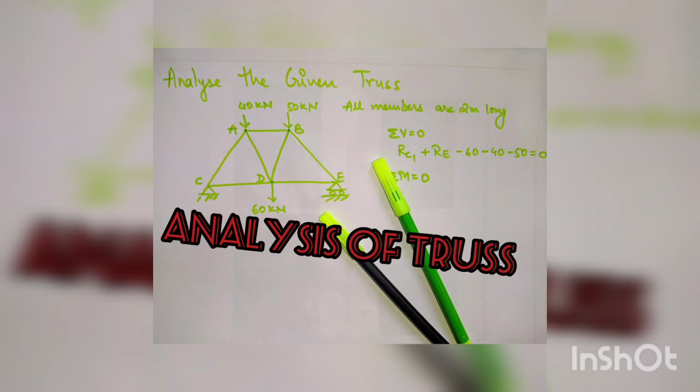Welcome. In this question, we have to analyze this truss.

So first, we'll be identifying the determinacy of this truss. One is internal and one is external indeterminacy. You can see one is the pin joint and one is your roller joint. For the pin joint, one vertical and one horizontal reaction will come, and for the roller, one vertical. I'm taking positive x direction and positive y direction as the reactions. So 3 reactions and 3 equilibrium equations, so external determinacy is 0.

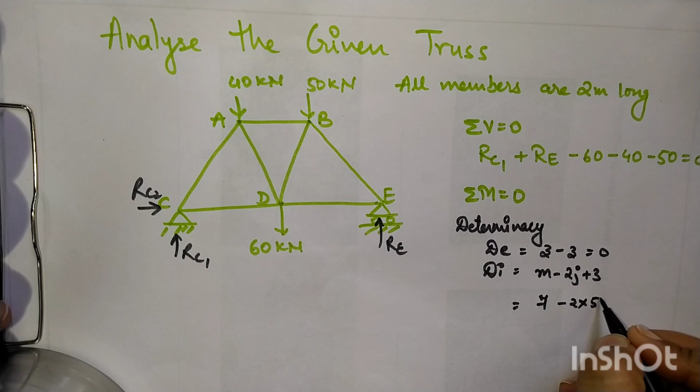Then internal. The formula is m minus 2j plus 3. The number of members is 7. The number of joints are 1, 2, 3, 4 and 5, so 5 joints. So this also comes out to be 0. So this is a determinate truss. Now we'll be identifying the reactions. We'll do summation of all the vertical forces equal to 0, so these 2 reactions equal all the forces coming from above.

Now we'll be doing summation of the moments. We'll be choosing C, and take all the forces. I'm putting this dot so that perpendicular distances can be found. Since all the members are 2 meters, this is an equilateral triangle. All the angles are 60 degrees. So this distance comes out to be 1.

Now I'm taking the moments. This 40 into perpendicular distance 1, so 40 into 1. This 50 into 3, also clockwise. 60 into 2, also clockwise. Why are we not taking the slant distance when all the members are 2? Because we are interested in perpendicular distance.

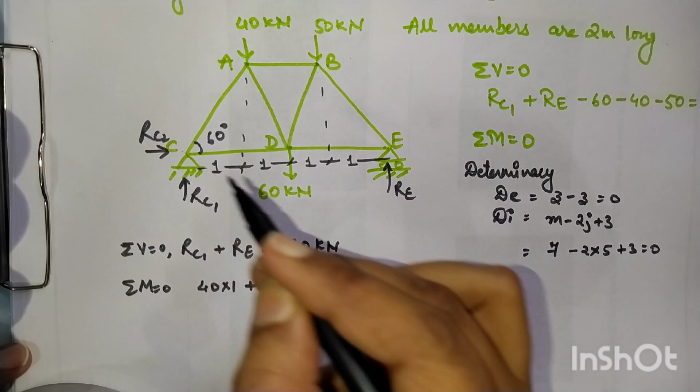Now the perpendicular distance for RE is 4, and it is anticlockwise, so negative. I am writing everything like that. So our reactions came out as 77.5 and 72.5. I am writing all the reactions here.

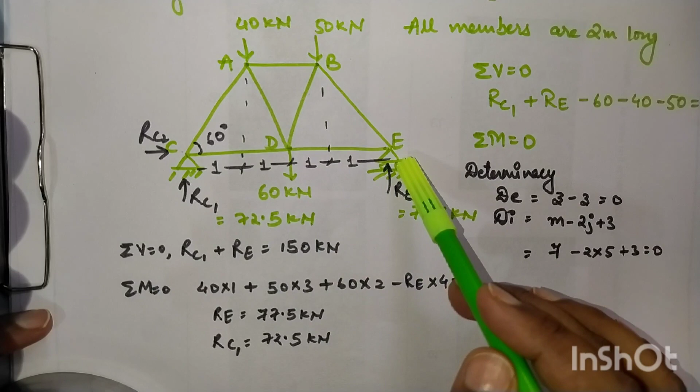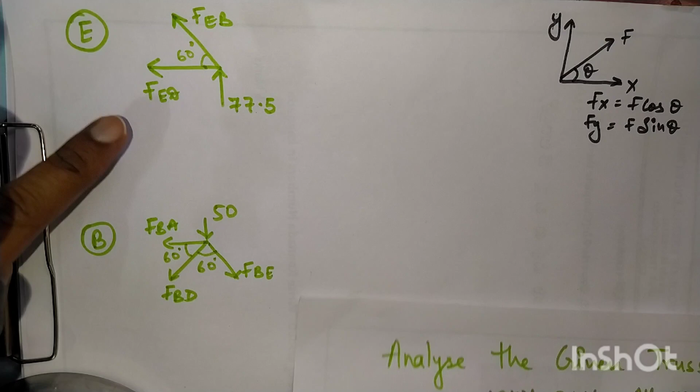Next, we'll be resolving all the forces. We'll take joint E because 2 are unknown and 1 is known. So 2 equilibrium equations and 2 unknowns, we can solve it. So I'm making joint E and joint B. The formula I'm using is Fx equals F cos theta. Number 1, all the vertical forces equal to 0. Number 2, all the horizontal forces equal to 0. So I am resolving all the forces at joint E and joint B here.

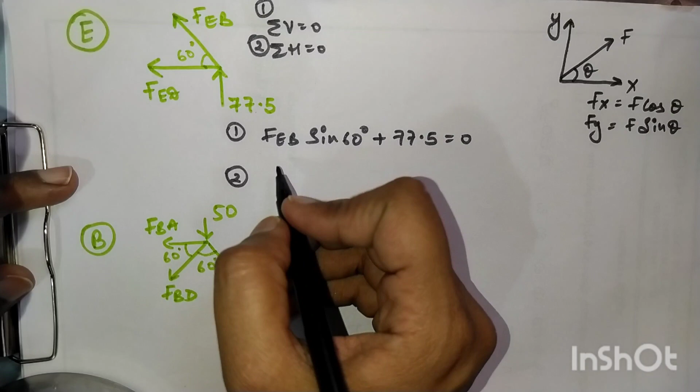For number 1, upward forces, we consider upward, the y-axis, positive. This is going up, so I write it as positive equal to 0. Number 2 is horizontal, but these 2 are going in the negative x direction, so I make them negative. Putting it all together, here come FEB and FED, the values going on to joint B.

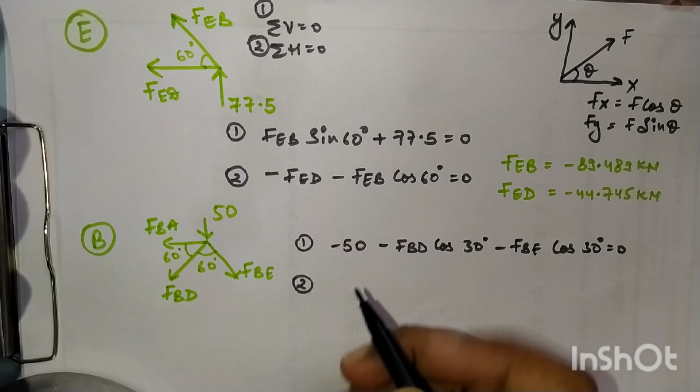Downward forces we consider negative, so minus 50 will come, and FBE and FDB will also come as negative because they point in the negative y direction. These 2 forces point in the negative x direction, so I put them as negative. Computing all this, we get the FBD and FBA values.

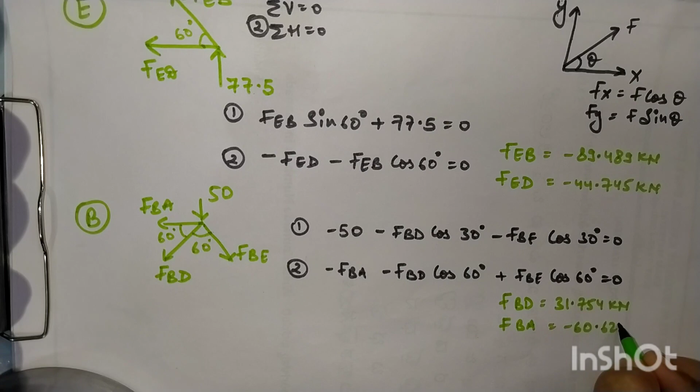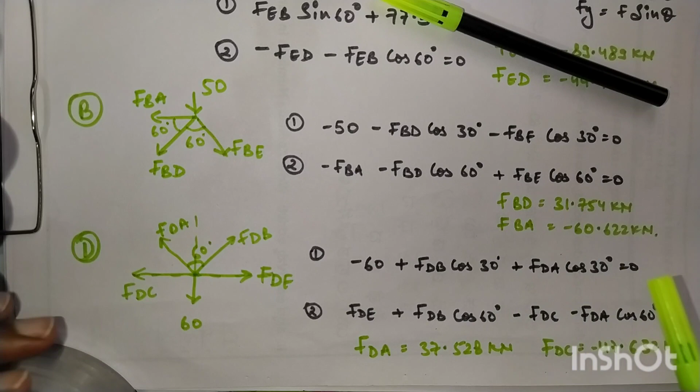Next is joint D. In joint D, these 2 we already identified and these 2 are unknowns. So we have 2 unknowns and 2 equations, we can solve this. For summation V, these 2 are going in the positive direction, these 2 in the negative direction, and minus 60 is also negative. So I'm writing FDC, FDA cos 60 degrees equal to 0. Computing these, we get the FDA and FDC values.

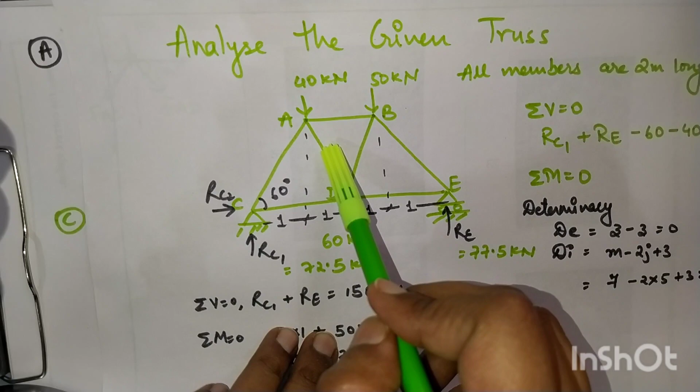Next are joint A and joint C. In joint A, only one unknown is there; these 2 we have already identified. And at joint C, this is unknown. I have drawn it here. For joint A, I have written all the vertical forces. This is going down, these 2 are also going down. These are going in the positive x direction, so I have written it like that. Computing, we get FAC equal to this much. In joint C, all the forces are positive, so I have written positive.

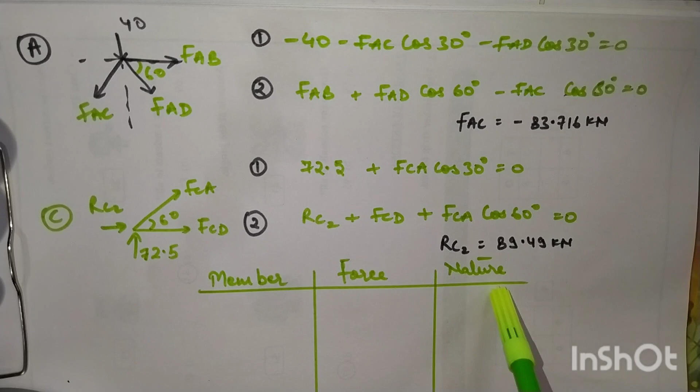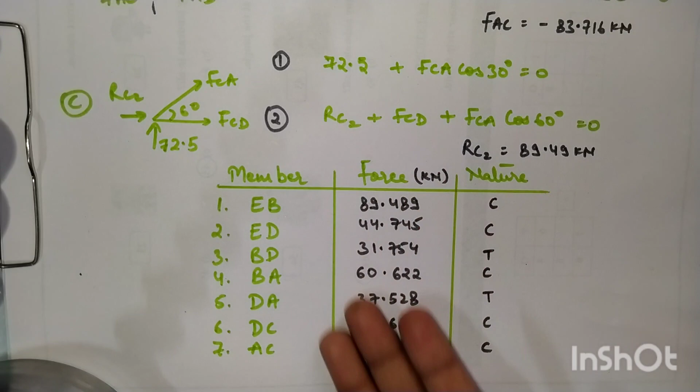Final step, we make a table: member, force and nature. We write all 7 members, the forces and the nature, compressive or tensile. I have compiled everything. For example, FAC is negative, so I have written compression. Wherever you find it negative, you write compression. I have also written kilonewton. So this is the final table you have to make.